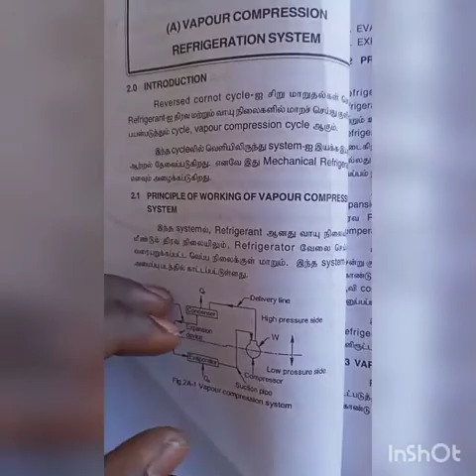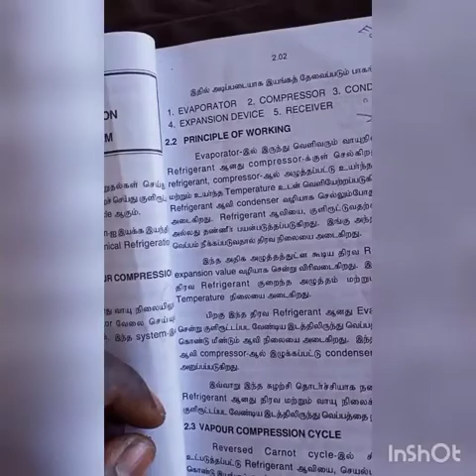In this video I teach you the vapor compression refrigeration systems. In that you learn introduction of the VCR system, various components, and how to draw the pH and TS diagram for vapor compression refrigeration systems. I give you 100% guarantee: after watching this video, you are fundamentally clear about the VCR system and you don't need to read anything else about VCR systems.

Individual components and individual lines, how to draw them on the pH and TS diagram, that I explain in this video. First, the introduction of the vapor compression refrigeration system. Why is its name vapor compression refrigeration system? In the VCR system there are 4 components you already know: compressor, condenser, expansion device and evaporator.

In the compressor, we supply the refrigerant in the vapor state. That's why the compression takes place in the vapor state. That's why its name is vapor compression refrigeration system. So in the compression, the state of the refrigerant is vapor, so it is known as the vapor compression refrigeration system.

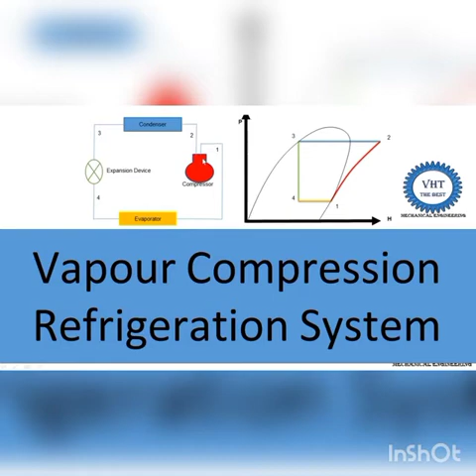Next we learn one by one the components and draw the lines on the pH as well as TS diagram. So in the vapor compression refrigeration system, the first component is the compressor. We all know the function of the compressor is to increase the pressure and temperature of the refrigerant or gas.

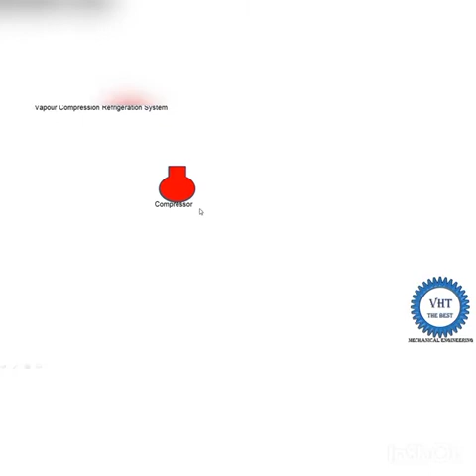So in the compressor, the refrigerant is coming from the evaporator. The suction of the compressor is connected with the evaporator, and this is the inlet line of the compressor, known as point number 1.

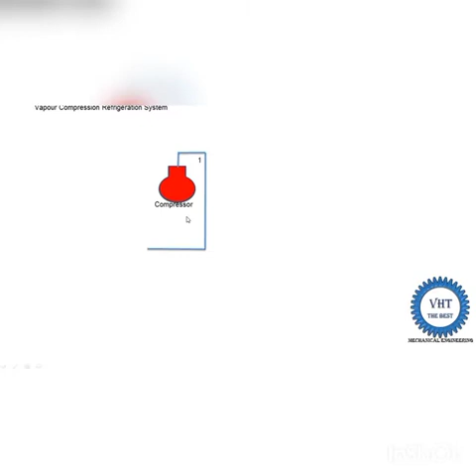Now, which state of the refrigerant is coming as suction? The suction refrigerant has low pressure, low temperature, and the state of the refrigerant is vapor.

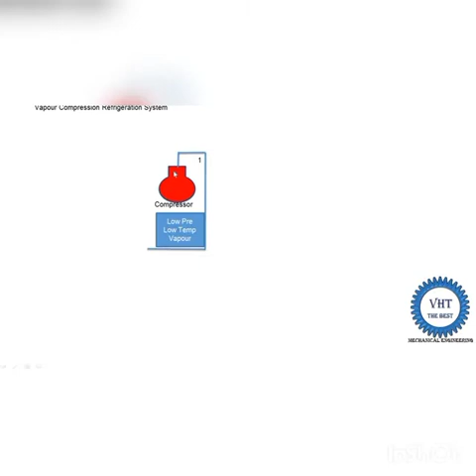Refrigerant is coming in the vapor state, then this low pressure, low temperature vapor refrigerant goes inside the compressor, and isentropic compression takes place. Isentropic means compression at constant entropy. After compression, its pressure is increased, its temperature is increased, and the state of the refrigerant remains vapor, it is not changed. Just the pressure and temperature change, and process 1 to 2 is isentropic compression, meaning entropy does not change during compression.

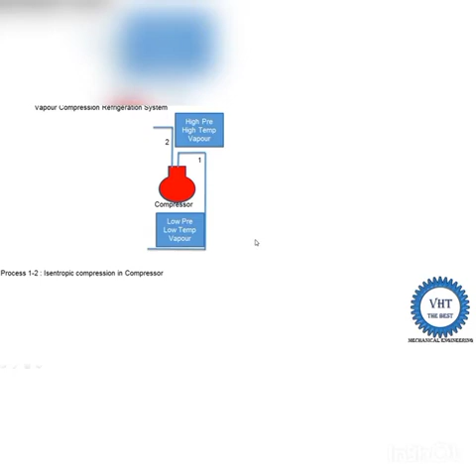Now we draw the 1 to 2 process on the pH diagram. On the y-axis it is pressure, on the x-axis it is enthalpy. If you don't know the various lines on the pH diagram, watch my video explaining which lines indicate which regions. The link is suggested on the top right corner of your screen, from where you can watch the pH diagram video.

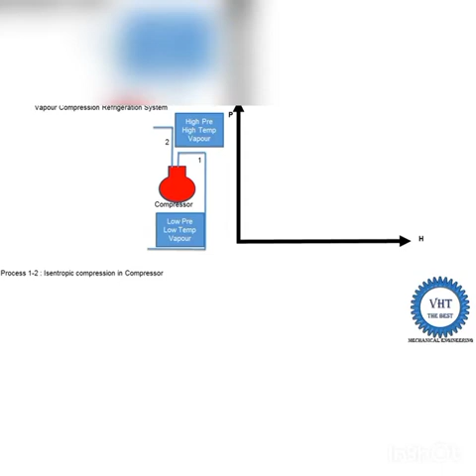In the pH diagram, the saturation curve is drawn, and here is the critical point. From the critical point, on the left side is the liquid line, and on the right side is the vapor line. On the bottom side it's low pressure, and as we move up, the pressure increases. On the x-axis, as we move right, the enthalpy increases.

So where we put point number 1, it is low pressure, low temperature, and vapor. Since it's vapor, point number 1 comes on the vapor line, and since it's low pressure, it comes on the bottom side. So point number 1 is here, suppose.

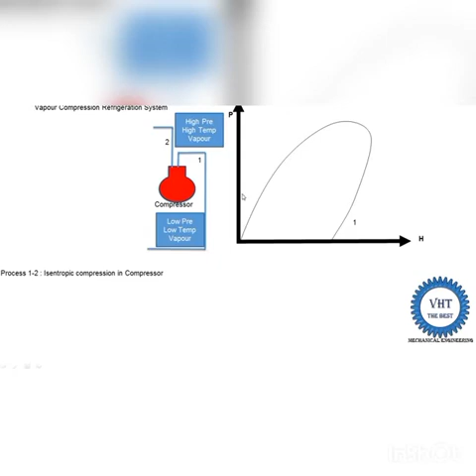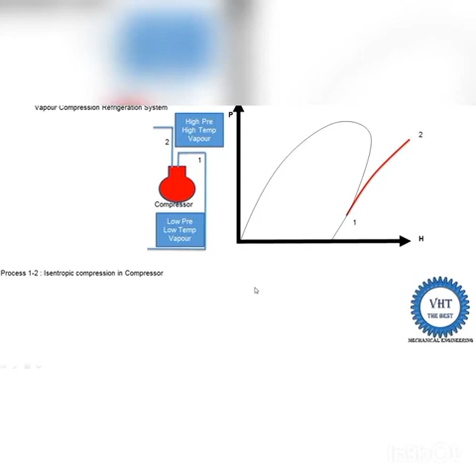Then after compression, pressure is increased, so point number 2 comes in the higher region. Its temperature is increased too, but it remains in the vapor state. Since 1 to 2 is isentropic, constant entropy is drawn as a curve line on the pH diagram from point number 1. This line indicates the constant entropy line, and point number 2 comes into the superheated region. Point number 1 is on the saturation line, it's saturated vapor, and after compression it's superheated vapor. Then we draw the process 1 to 2 on the TS diagram.

On the y-axis it is temperature, on the x-axis it is entropy. Similarly to the pH diagram, the curve line is drawn on the TS diagram. This is the liquid line and this is the vapor line. Point number 1 comes on the vapor line; since temperature is low there, it is put on the bottom side of the curve line, so it is point number 1.

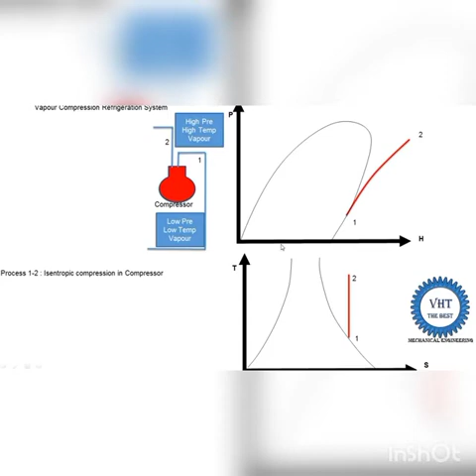Isentropic means entropy is constant. On the x-axis there is entropy. When entropy is constant, that means S1 equals S2, and S1 equals S2 comes when we draw a vertical line. So from point number 1 we draw the vertical line, which is process 1 to 2. In that line you check that the temperature moves from low to high. So at point 1 it is low temperature, and at point 2 it is high temperature.

Then it is supplied, and we find out the compressor work. WC is the amount of work supplied to the compressor. It is equal to the mass of refrigerant supplied to the compressor times H2 minus H1. So you take the values of H2 and H1 from here and put them in. You also know that change in enthalpy equals Cp times delta T, so here also we can write it as mCp delta T.

Then it is supplied to the condenser. The condenser is a type of heat exchanger that removes heat to the atmosphere. The process takes place from 2 to 3, and 2 to 3 is known as isobaric heat rejection in the condenser.

When any heat exchanger is there, we assume that there is no change in the pressure, that means constant pressure, which is written as the isobaric process. At constant pressure we are rejecting some heat to the atmosphere.

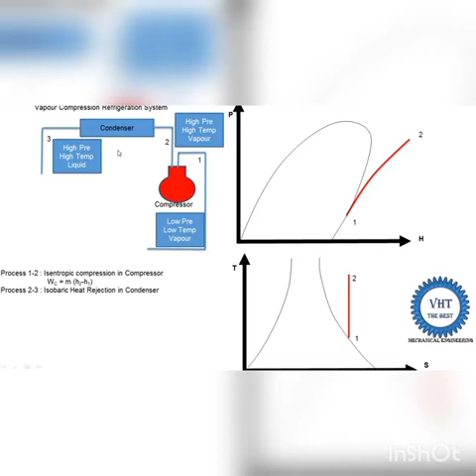Inlet of the condenser is high pressure, high temperature vapor refrigerant. After removing heat to the atmosphere, its state changes. It is isobaric, so pressure remains high pressure. Temperature is also high, because at constant temperature we are changing the phase of the refrigerant, so it converts from vapor to liquid. This is called latent heat rejection.

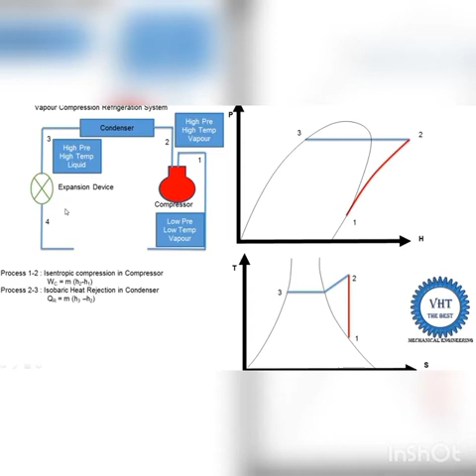Process 3 to 4 takes place, and this means it is an isenthalpic expansion. Isenthalpic means enthalpy remains constant during this process, and when expansion takes place, the pressure is reduced, meaning pressure is converted from high pressure to low pressure.

In this VCRS system, the compressor and condenser are at high pressure, and the expansion valve and evaporator are at low pressure. So the expansion valve converts high pressure into low pressure. Due to expansion, temperature is also reduced from high to low, and the state of the refrigerant remains liquid at both inlet and outlet. So here we write it as low pressure, converted from high to low, temperature also converted to low, and the state remains the same, in the liquid regime.

Now this line, process 3 to 4, is drawn on the pH diagram. How do we draw it? It is an isenthalpic process, enthalpy is constant, and it is on the x-axis. So from 3 to 4 it either moves upward or downward direction.

But we know that in the expansion, pressure is reduced, converting from high pressure to low pressure. That means point 4 is moving downward compared to point 3, and since enthalpy is constant, it is a vertical line. So from point number 3 we draw a vertical line in the downward direction, and that point is point number 4. So pressure is converted from high pressure to low pressure.

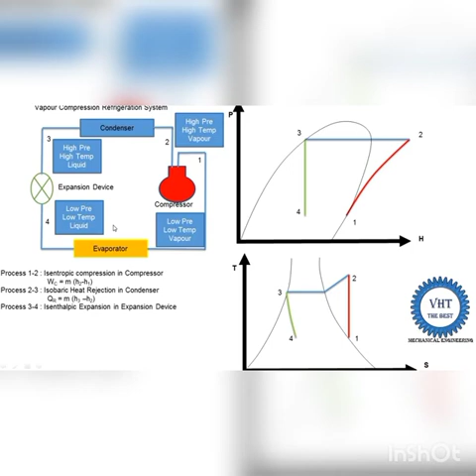Then after this, low pressure, low temperature liquid refrigerant is supplied into the evaporator. Now what is the evaporator? The evaporator is also one type of heat exchanger. It is installed where we require to absorb the heat, or at the place where we require cooling. So in the fridge of our home, it is installed in a part of the refrigerator. In the AC, it is installed inside the room, so it absorbs the heat from the room and rejects it into the condenser. So the evaporator is again one type of heat exchanger.

In the heat exchanger, it is the process 4 to 1, and it is the isobaric heat absorption process. In the condenser, we reject the heat. In the evaporator, we absorb the heat. Due to the absorption, we get the cooling of the particular space. So it is an isobaric absorption process, meaning it absorbs the heat. Isobaric means the pressure is the same, low pressure, the temperature is also the same, low temperature, and due to absorption of the heat, its phase is changed from liquid to vapor. So again we absorb the latent heat, not sensible heat. Latent heat is absorbed, that is why its phase is changed from liquid to vapor. In the condenser, we reject the latent heat, so it changes from vapor to liquid.

So we draw this isobaric heat absorption line in the evaporator. It is process 4 to 1. When point number 4 starts to absorb the heat, it starts to convert into vapor, and it's at constant pressure, that's why it is drawn as horizontal. And we get the closed system. Similarly on the TS diagram, it's done at constant temperature, and it moves towards the vapor line from the liquid line. Here it is liquid plus vapor from point number 4, and then it is connected. So it is a completely closed system because the mass of refrigerant is continuously circulated inside this system.

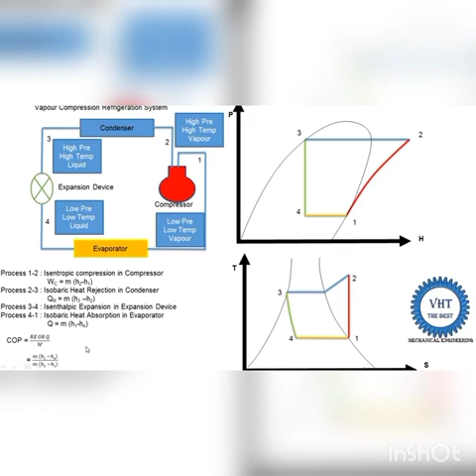Next, we write the equation of the COP. COP is defined as the refrigerating effect to the work done supplied to the system, or simply output upon input. What is our output? That is the heat absorption in the evaporator, which is known as the refrigerating effect. And what is supplied as work? We supply electricity or mechanical work to the compressor, so it is our input, known as the work done. The work done equation is M into H2 minus H1. The refrigerating effect is M into H1 minus H4, and M cancels, so the equation is H1 minus H4 divided by H2 minus H1.